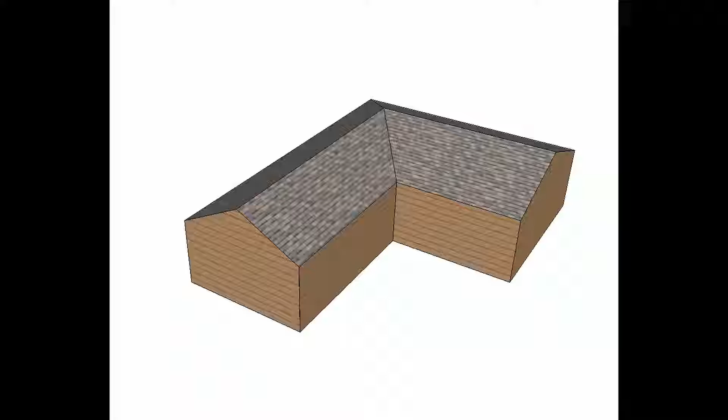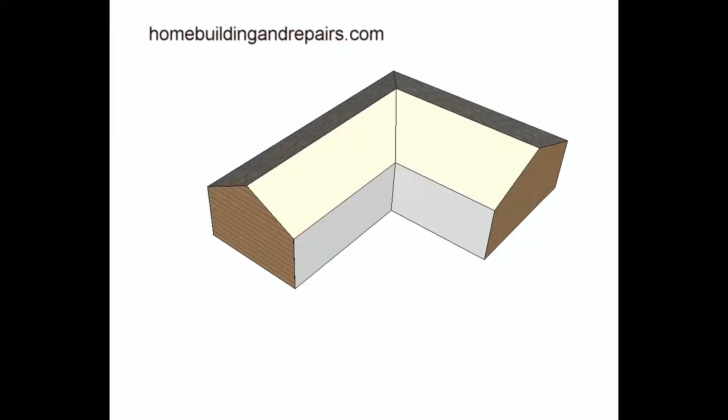Here's a question I received. The individual has a house with two gable ends, a valley and a hip, some type of a roof design like this. And they were thinking about installing a room addition, but having a difficult time trying to figure out how to build the roof. So I went ahead and drew up a few things.

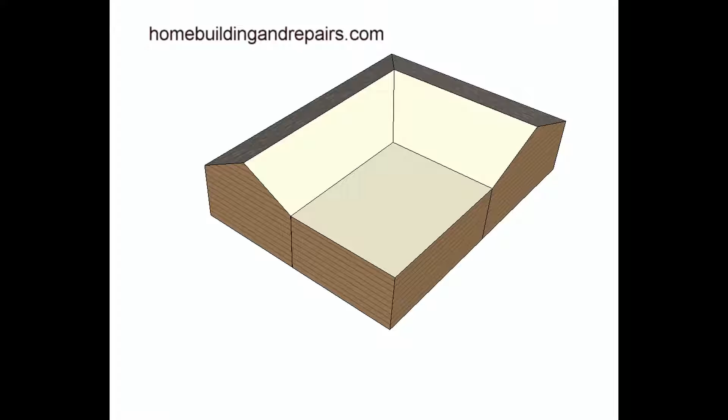So this is basically just stripping the roof shingles off and exposing the two walls so that you can build the room addition. Now here's one roof you can do. This actually would be a double gable. You would have two gable roofs here, and it would go back with a valley and a valley here. And of course you could change the pitch of the roof to adapt to the ridge.

It's not uncommon to have to build a room addition where you might have a little wider area here, which of course would raise the ridge of the roof if you use the same pitch here. So if you used a 5 and 12, for example, it might raise the ridge of the roof up about a foot or two, let's say, and you might not like that. So you could always change the pitch and make it a little lower if it would work in a situation like this so that it's not sticking up past the ridge.

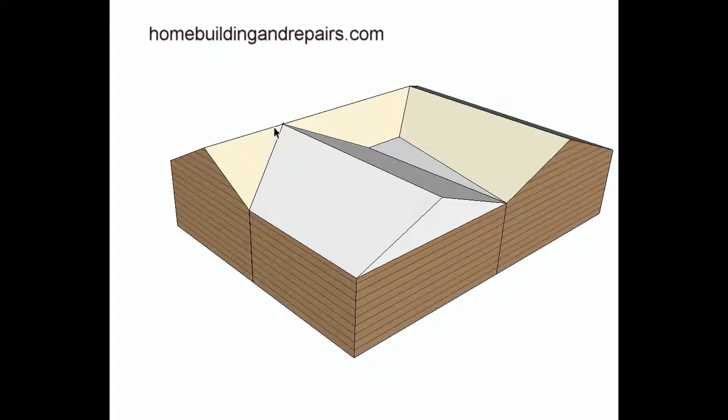Now we have a cricket here. We call them crickets. You might call them something else. This is actually another part of the roof you would build after this is done to allow the water that would be coming off of both of these roofs to drain off of the roof. Without this, you could just imagine all the water would pool up here, and that would be a problem. And of course, there are other ways.

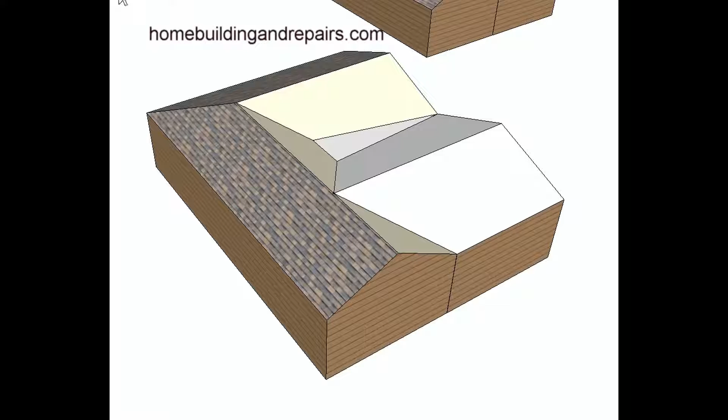I actually lived in a house where both of the gables came down like this, and they just had a piece of sheet metal that was about 3 foot wide, and they kind of formed it into this area, and that drained the water off. So there are other options for that also.

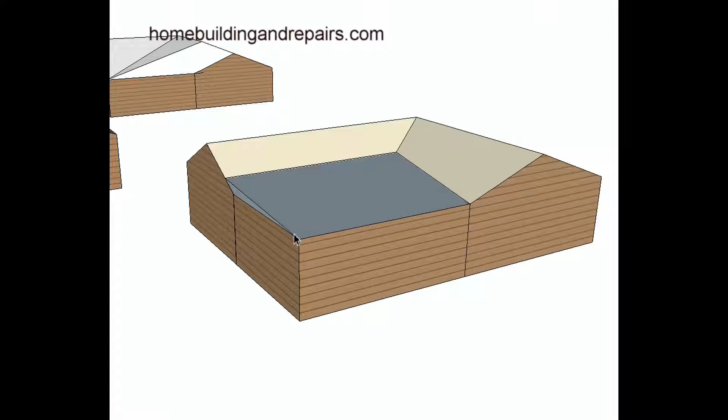This would be the cheapest roof, I would imagine. This would be a low sloping roof. You could just keep the pitch small enough to where you can get the water to drain off. And again, this isn't going to be a square roof. It would be square on this side, but these two lines wouldn't be parallel. You would have a sloping section of the roof here. I hate to call it a valley, but I guess that's actually what it would be to drain the water off.

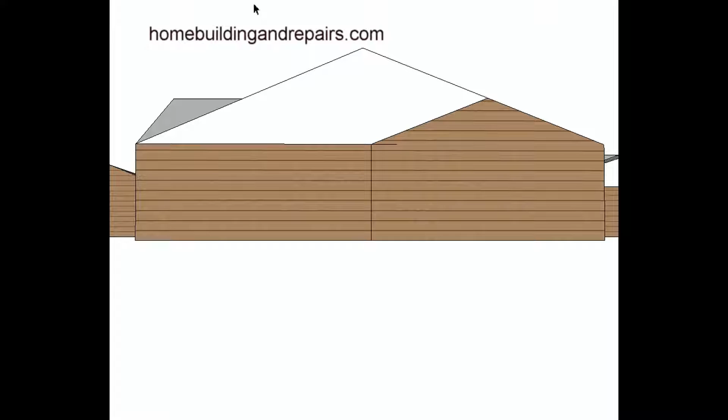Here's a little more complicated version. We have a double gable. You would simply come up and down and then create another gable over here, and then you can see the valley on this side and a little gable end on this side sticking up. Now you can always get rid of this gable end.

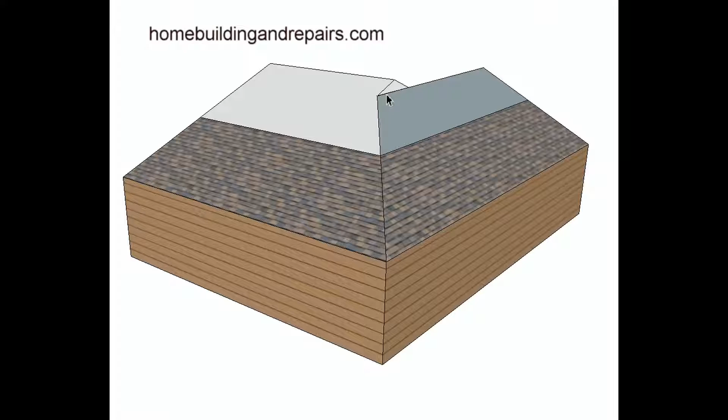You can run this hip all the way up and then run it down on the other side, in other words continue this plane all the way up, and then you would basically have a hip that would run all the way up to here and a little hip that would run down to here as another way of fixing that. And again, you could always lower the slope on the other side if you could. This right here might create a problem if you change the roof pitch, but you could always stop it right here. Maybe that's a possibility.

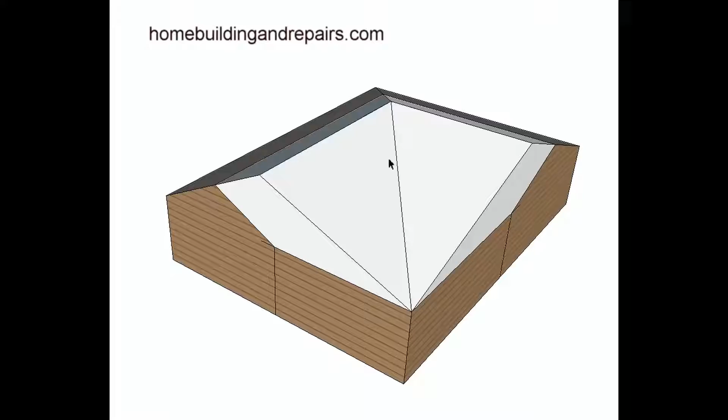There's that one. Next up on the list would be to create a gable with a pitch that would be different. So you would have, let's just say, a 5 and 12 on this side, run it up to here, and then run it down and create a different section, I should say, a different gable side here. So you might have a 5 and 12 slope here and a 3 and 12 slope on this side. This is called an offset roof pitch and is also another common way to solve problems that you're having a difficult time trying to figure out.

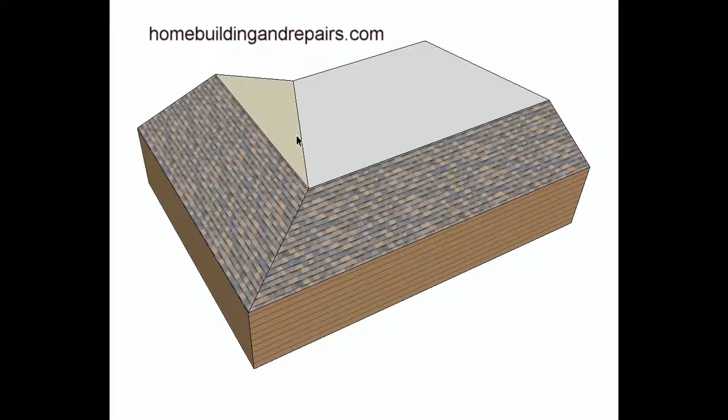Last but not least on our list, we would have a roof like this. This would simply just fill in the area here with a roof rafter that would come up to here, and again, this would probably be an inexpensive way to build a roof like this, and then of course you would have a valley down here. Anyway, I hope it helps.